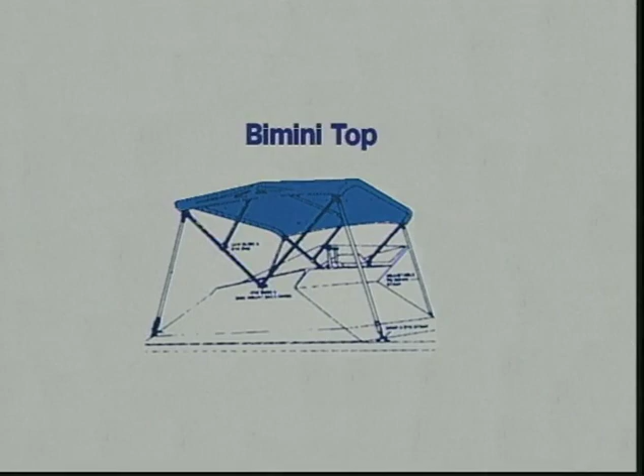We have a bimini top frame, which can be used on a flybridge, can be used in the center cockpit of a sailboat, it can be used on an aft cockpit sailboat, and it can be used on a center console fishing boat. On the other side of the brochure here, we have some Dodgers which require frameworks. And those are the things that we're going to be talking about today as to how to design the frame and how to bend it to fit the project that we're going to have.

Now, one of the most important things in designing framework and bending frames is what do we design to? You'll have to learn this, that boats are not built plumb, level and square. Boats are built crooked. They have rounded lines, and we have to make our framework make those lines look better. So the starting point for all frame design is this.

Find the center line of the boat and build everything that you build to the center line of the boat, disregarding the fact that the windshield might be out of square with the center line by an inch. Because if you try to build to the windshield, you may have your canvas running right off the corner of the boat. So we're going to show you right now how to find the center line of the boat.

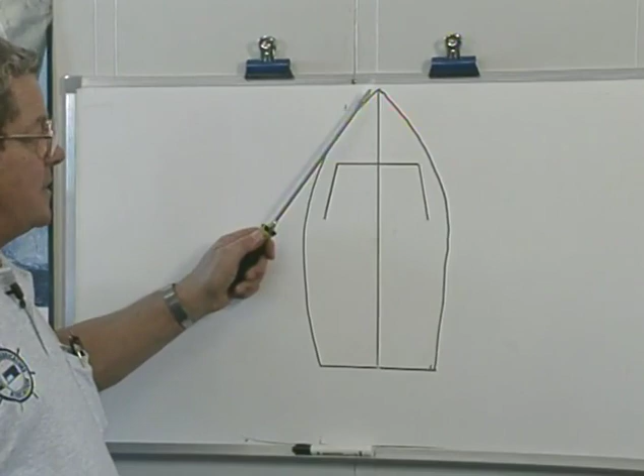And up here on the board, I have drawn a picture ahead of time of a boat. May not be the best picture in the world, but it's a top view of a boat. It has the outline of the windshield shown here, and I've drawn a center line. Now this one I drew exact on this picture. Now how do I get that exact center line on a boat? Well, here's the way that we go about it. We do what I call triangulation.

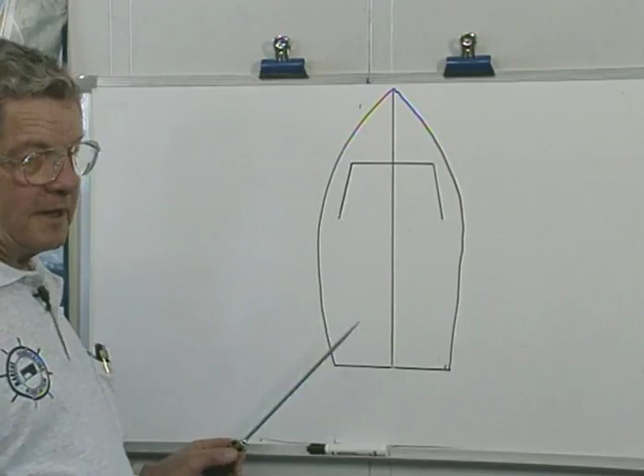It's pretty easy to find the center line on the bow because you can look and find the real center on that. It's fairly easy to find it on the stern because you can measure across. But what are we measuring across? Those points are the things that will help determine how we triangulate this boat. So what I do is I look on the boat for some place on the back corner of the boat that was designed into the mold that would be symmetrical on both sides of the boat.

Because when they build molds, they spend an awful lot of money building a nice mold. What we do not do is ever measure from something on the boat that was put on there by a mechanic or somebody like that, because they don't always put them in the same place on the boat. So we look for a place on the mold that is consistent. What do we do with those two places that we find?

We take our ruler, and I'm going to draw them on here. We're going to assume for the moment that I found a point on this corner and a point on this corner that were consistent on both sides of the boat. What I do is I hook my ruler on this corner and I measure across the center line of the boat to some point on the windshield. And where my ruler touches the windshield here, I will take a reading.

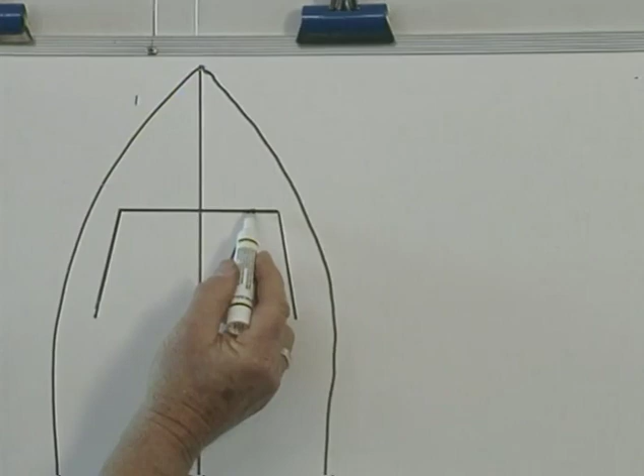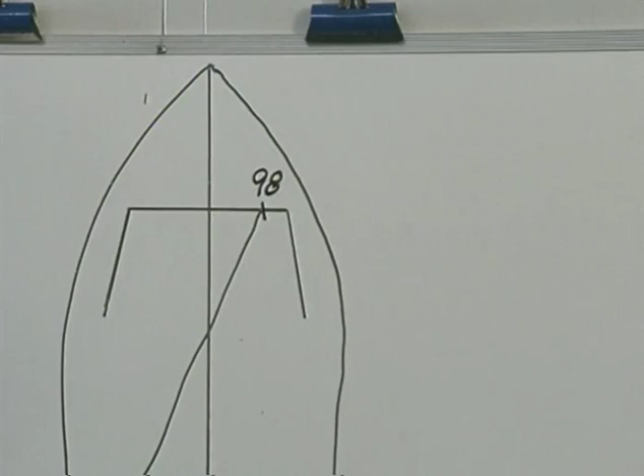And let's just assume for a minute that when I measured up here, my ruler hit the windshield at 98 inches. So I would put 98 inches right there and just put a mark on the windshield. Now to find the center line using the other corner of the boat, I'll hook my ruler over on the starboard side at the corner and bring it up across the center line of the boat, and where 98 inches intersects with the windshield, I'll draw a mark. And now I've got 98 inches over here.

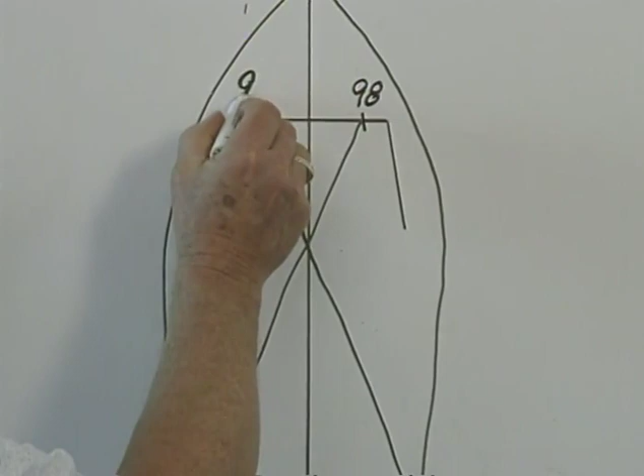How do I find the center line? If I measure from this mark to this mark and take half of it, I have now established the true center line of that boat. And that is what we will be building all of our frames to.

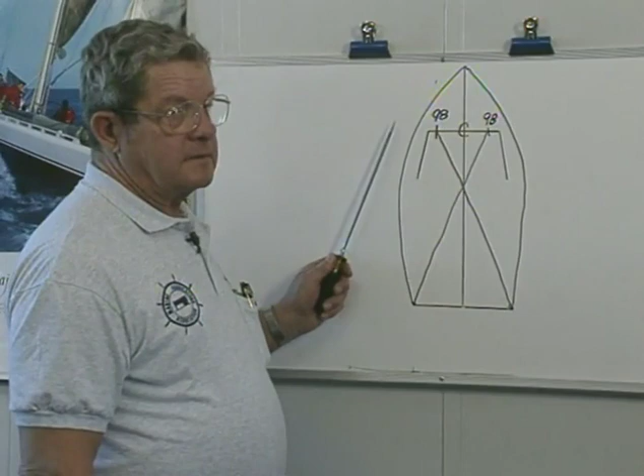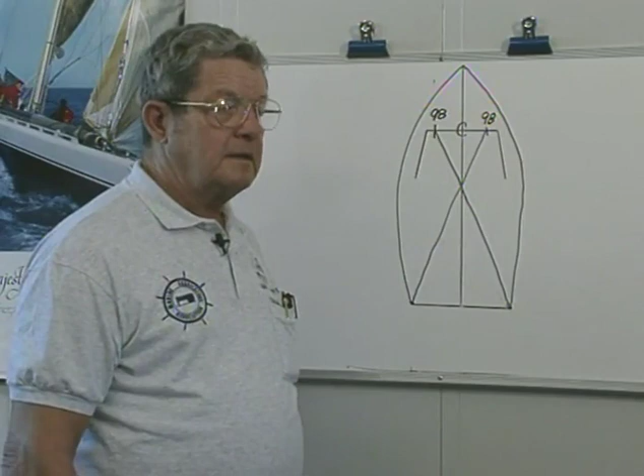Now, I don't have a picture of a sailboat up here, but all of the same rules apply when it comes to a sailboat. You'll find the center line of the bow. Masts are built into a sailboat in the center of the boat. I've never seen one that wasn't in the center, so we'll find the center of the mast. We'll find the center on the stern, and if I have to make sure that my product is right, I will string a line from the stern to the mast to the bow. I'll do the same thing on a powerboat, because everything that we build will be built square and true with the center line of the boat.

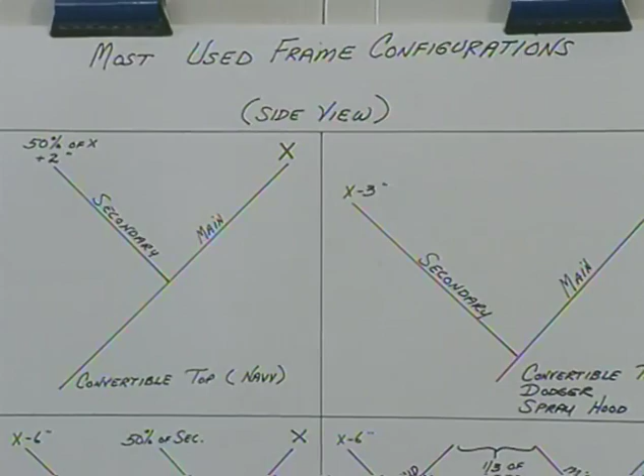Okay, now that we've established the center line on the boat, I've put a drawing up here on the board of the most used frame configurations that are used for all of the products that we have to build for boats. The reason I put these up here is so that you can have an idea of what kind of a frame you have to design. So I've got these 5 pictures here, and I'm going to start up here in the top left corner. This is the general configuration that would be used for a convertible top or a navy top.

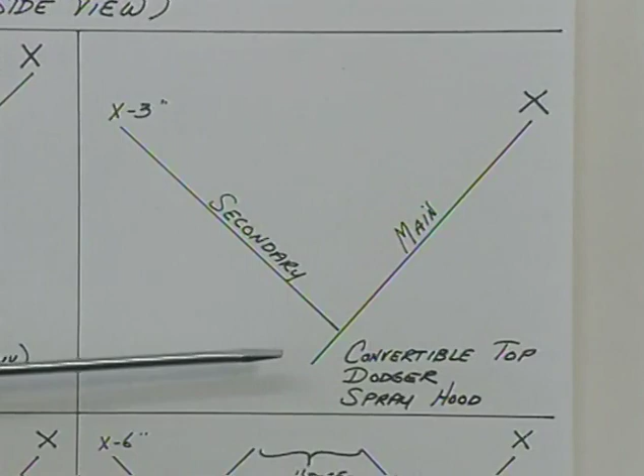The next picture on the right shows the general configuration of a framework that could be used for a convertible top, a Dodger, and a spray hood. Now, why do I have 2 different pictures for a convertible top? The reason is this. Years ago on the older boats, the first picture, you were able to mount your top on the coaming or someplace down in the boat or on the side panel.

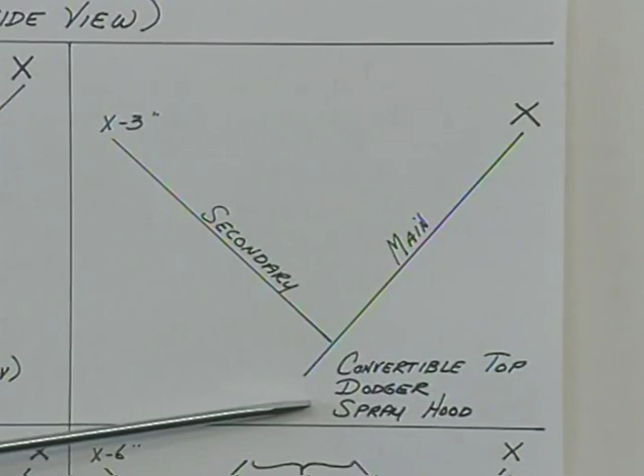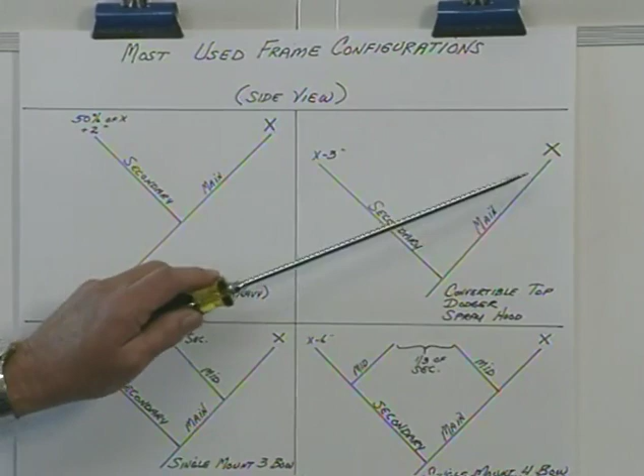Nowadays, the way they're building boats, we've had to change our configuration a little bit because the majority of the windshields are rounded windshields, and there is no place to mount the framework on the coaming. So we have to mount on the windshield. So consequently, when we get into the design and how to figure the leg lengths, it's going to require this general shape of a framework.

The next framework that we might be using would be for a bimini top, which is this picture here, and we call it a single mount 3-bow bimini top. The next configuration that we would be using would be a single mount 4-bow bimini top. Now I need to stop right here for a minute and say, why would we go from a 4-bow to a 3-bow bimini top or the reverse? The reason is we have some rules that we go by as to how many frames it takes to build a particular project on a boat.

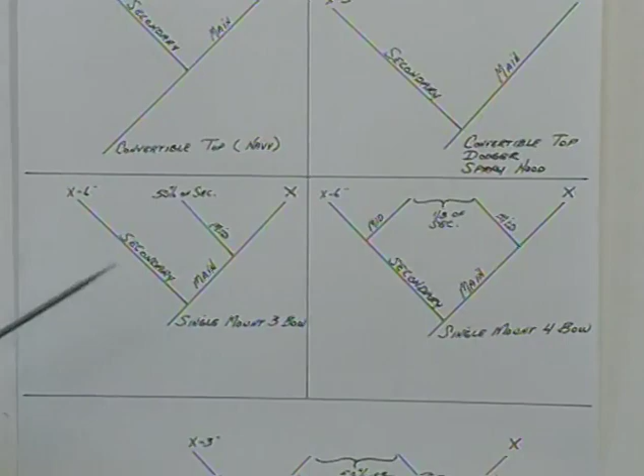And our rules are that we never go over 36 inches from frame to frame to frame. Same would be true on a 4-bow top. Same could be true on a Dodger or a convertible top. On a convertible top, you'd be going from windshield to frame to frame.

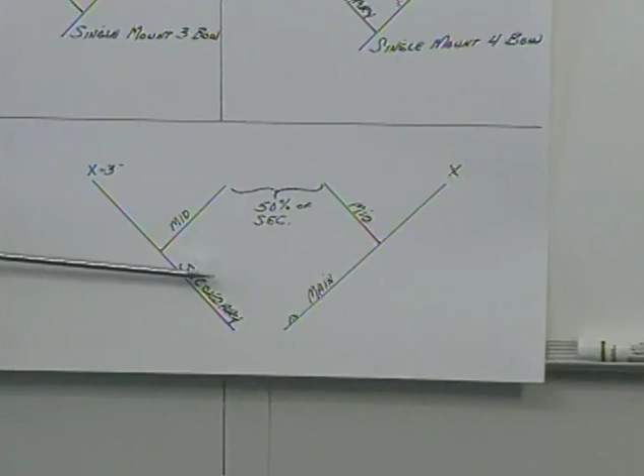The bottom picture down here shows you a 4-bow split mount bimini top. Why is it even needed? Because on center cockpit sailboats, many times the place that you want to mount your top is right in the middle of the area, and there's always going to be a winch or some crazy thing there so that you can't get the frame mounted where you want it. So we would split them out so that we could have a winch here and we could gain a little more length. This also can be done on some of your fly bridges where you have to have a very short frame as far as height, but a very long frame as far as overall length.

So these are the 5 most commonly used configurations of frameworks for boats. Now, I'm not going to take the time to go through what all of these things mean, but let me tell you this, that in order to design and bend frames with the system of bending that we have, we have to know what the main leg length is.

So on every one of these pictures here, you'll see that there's an X. And the leg lengths for all of the frames that attach to the main frame will be done by formulas. And I have taken this sheet and I've put up here the formula for the leg length for all of the succeeding frames that have to attach to the main leg.

So later in this tape, we're going to get to the point of teaching you how to determine what X is, and all of the rest of the leg lengths will be determined by formulas. And you'll have plenty of time to look over this complete chart and see what those formulas are.

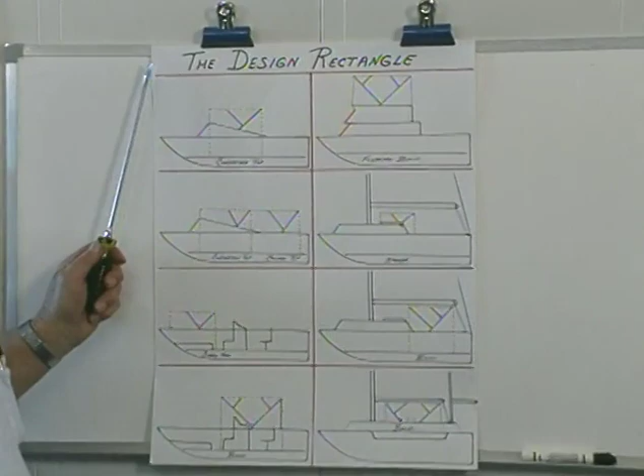Continuing on with design of framework for boats, I have here on the board what I call the design rectangles. It's kind of a crazy name, but it's the only thing I could think of. But when I walk up to a boat to design something for it, the customer's already called me and he told me he wants a particular product. So as I'm walking up to the boat, I have a mental image of a rectangle standing on edge.

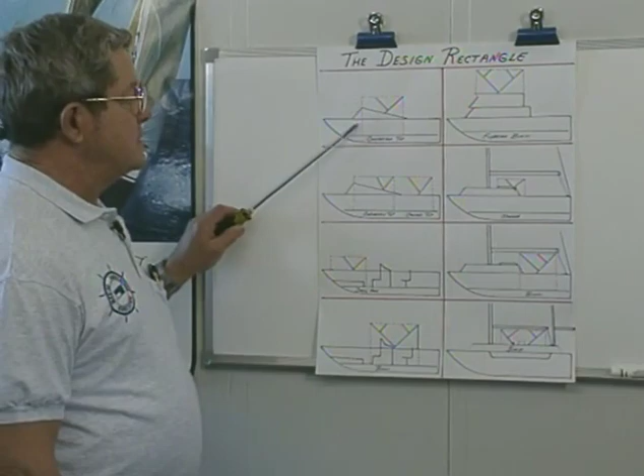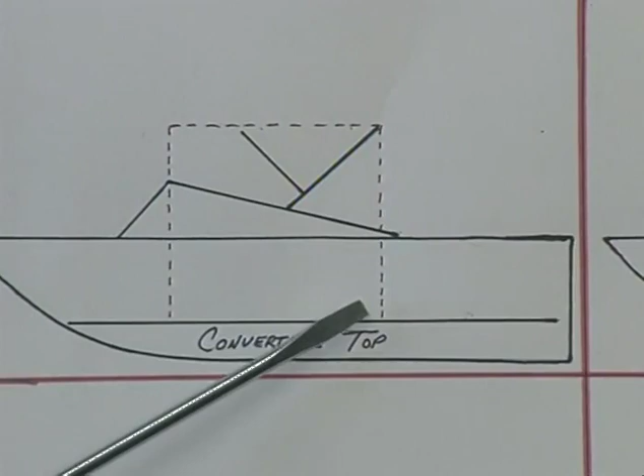So I've tried to draw these rectangles on all of these configurations of boats. And this rectangle right here is what I'm trying to explain to you. This dotted line represents that rectangle. What we're looking at right here is a convertible top. So what the rectangle does for me is this. It helps me establish an overall length of the area that's got to be covered, and it helps me establish a height of the area that has to be covered.

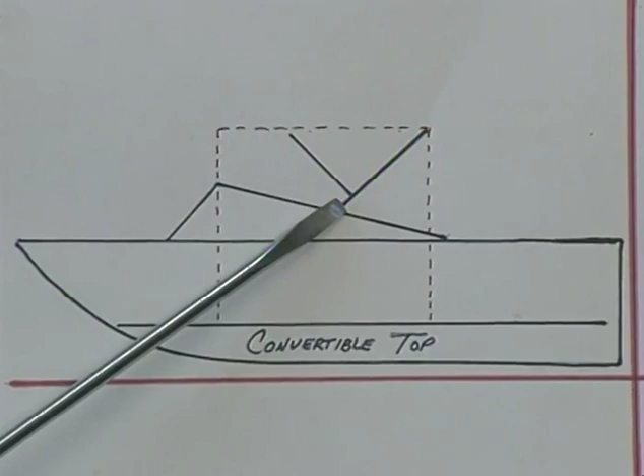So this is the rectangle that I'm trying to talk about. And this does one more thing for me. It helps me establish the configuration of the framework that might be required to support the canvas. It will also help me establish a mounting point. I'd kind of like to go through all of these different configurations with you so that you know what I'm talking about as I talk about these rectangles. This is what I would look at for a convertible top.

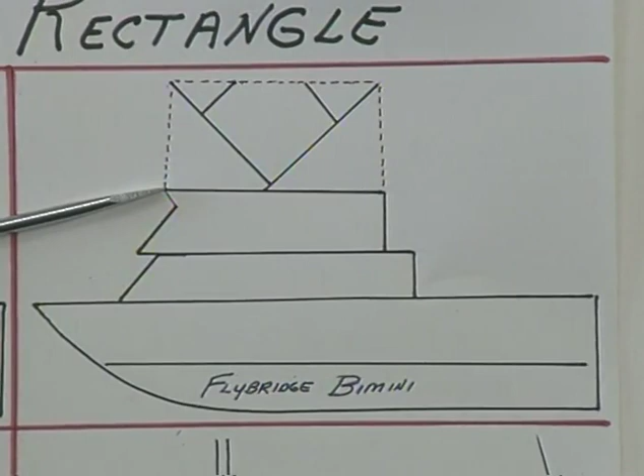The next picture that I have over here is for a flybridge bimini. You've got the cruiser with the flybridge on it. Here's your windscreen that's faired out to the front. The man wants his flybridge covered with a bimini top. So I look at the area that has to be covered. This gives me a height and a length.

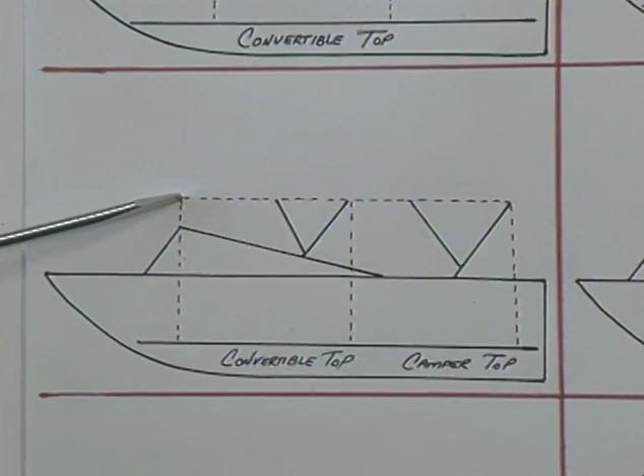Now we'll move on down to the next picture, which is a convertible top with a camper top. We have the same as the first picture, but behind that we've added another set of frames and another rectangle that establishes the length and the height of the camper top frame that we have to build.

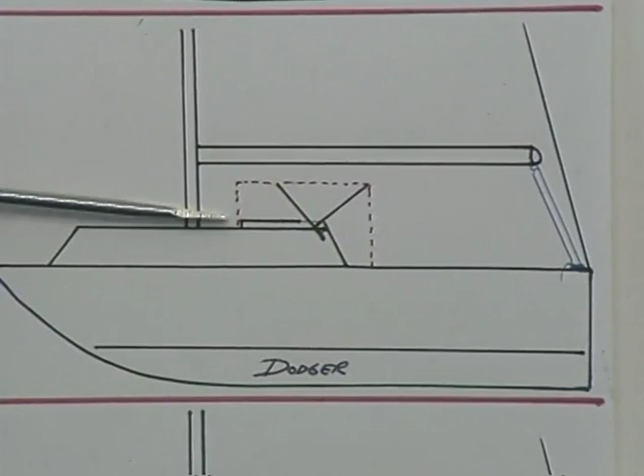We move on over to the next picture for a Dodger on a sailboat. Normally with a Dodger on a sailboat, the area that you would have to cover would be just forward of the companionway. And we always try to finish the Dodger approximately 6 inches aft of the companionway opening. Why? So that when the Dodger's up and it's raining or the boat's taking on water, it doesn't shoot water down below. So here's the rectangle, height and length.

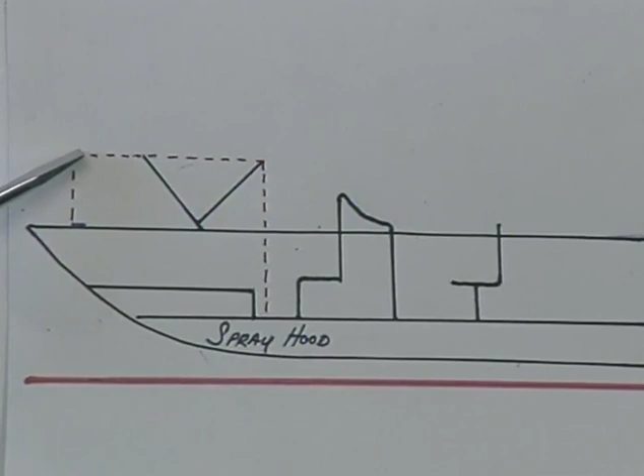Moving on down to a center console fishing boat, you have a spray hood, which is nothing more than a Dodger on a sailboat, except that they call it a spray hood because it's on a power boat. It does all of the same things. It protects you from the spray and the elements. So again, the same rectangle from the coaming up for height. Length is determined by coming back and trying to cover the step that's built into the boat and still allow room for the customer to walk around this console, which is this thing right here. So now we've established a height and a length.

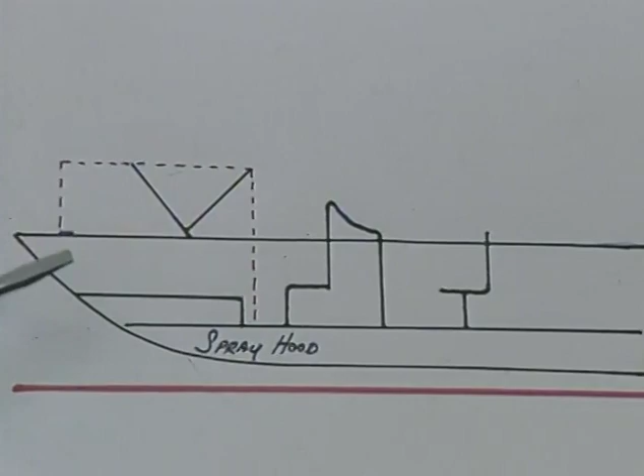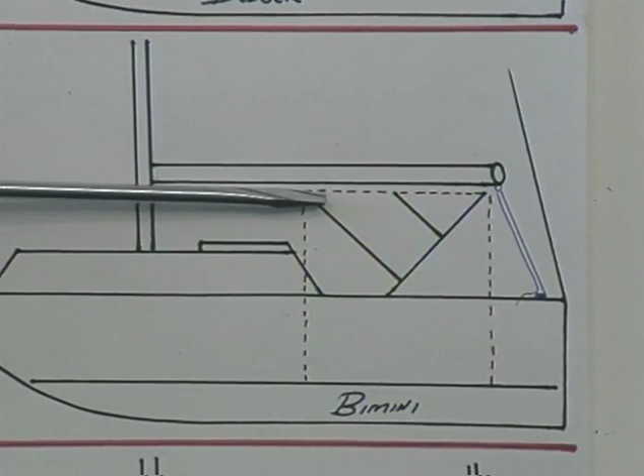Moving on over to an aft cockpit sailboat, and we want to build a bimini top on it. We measure the area of the cockpit that we have to cover. We get the height off of the deck, and that will be determined by the boom, because when we build a bimini top on a sailboat, we always build our tops so that they're at least 1 inch lower than the boom when the boom is sheeted down tight. So now that establishes height and length.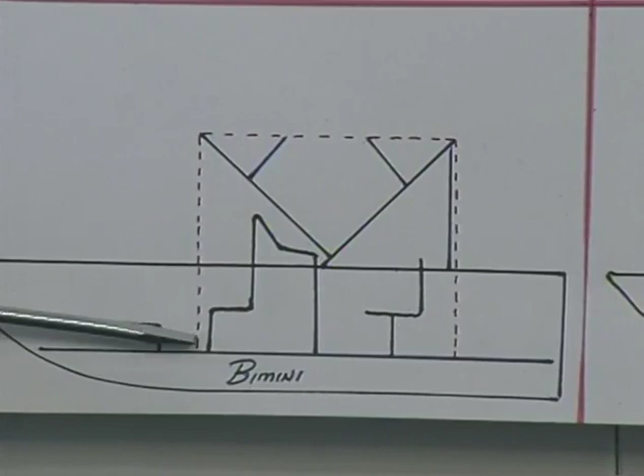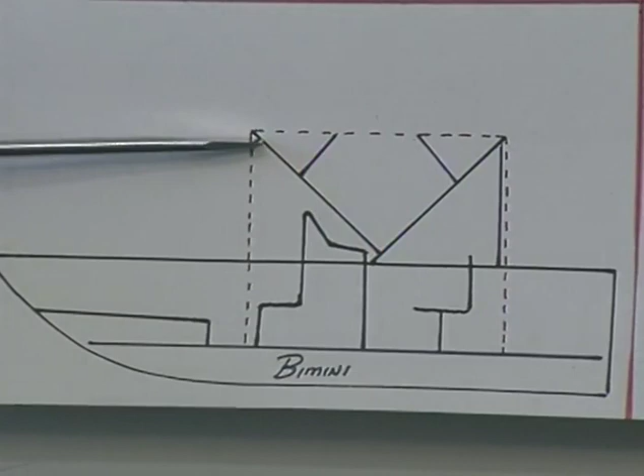Normally we would want to cover from the forwardmost seat to the aftmost seat. So now we've established the length of the rectangle and we've established the height. What did we establish for height? We established 6'4". Why? That's an arbitrary figure that we came up with, but the average man is about 6 foot tall, so we make our bimini tops 6'4" tall unless he specifies otherwise.

And if he has tall friends, we take a chainsaw and cut their legs off.

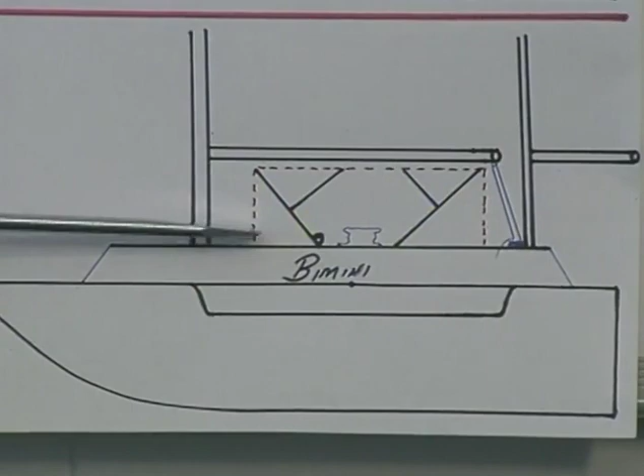Continue on down to a 4-bow bimini top on a center cockpit sailboat. I've got what used to be a Morgan 41, I think it was. Anyhow, it's a center cockpit here. That will establish the length of the rectangle, and the height again will be established by measuring from the mounting point up to 1 inch below the boom.

On sailboats, you have to remember this, that you may not always be able to give the customer 6 foot 4 inches. It's your job as a fabricator when you sell a bimini top on a sailboat to make sure that you either get permission from the customer to put the mainsail up and sheet it down tight in the middle of the boat, or have him do it and set the topping lift so that the boom will never be any lower than that. Then you build to within 1 inch of that point.

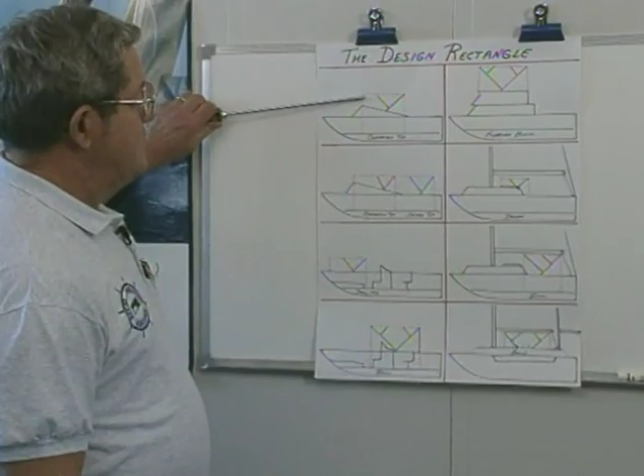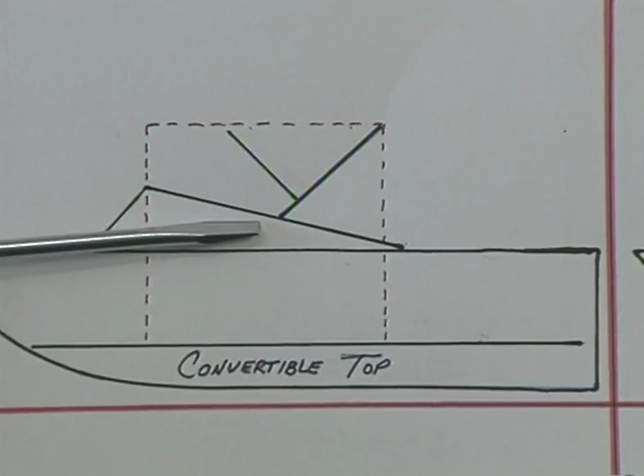Now, back to my rectangles, okay? When we're designing frames, it's your job as a fabricator to figure out where you're going to store these tops. And they get worse and worse to figure out as we go along. This is the new style of convertible top on the newer style runabout type boats. And again, I said they had to mount on the windshield, and many times they have to store over here behind the back seat. But again, it's your job to figure out where they're going to store and tell the customer where that's going to be.

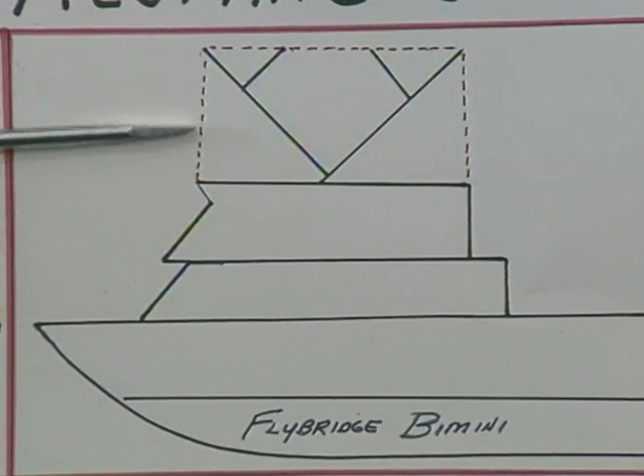On the next picture over here for a bimini top on a flybridge, many times you can't lay it down to store it, because if you laid it forward, it would be laying out over the windscreen. If you laid it aft, it would be laying out over the back end of the bridge. So what do I do? I would draw another line here, and that would represent a stanchion for storage purposes. Then when you fold the top up, all of these frames fold up to this frame, and you put a boot on it so that it looks nice. That would be the storage position for that.

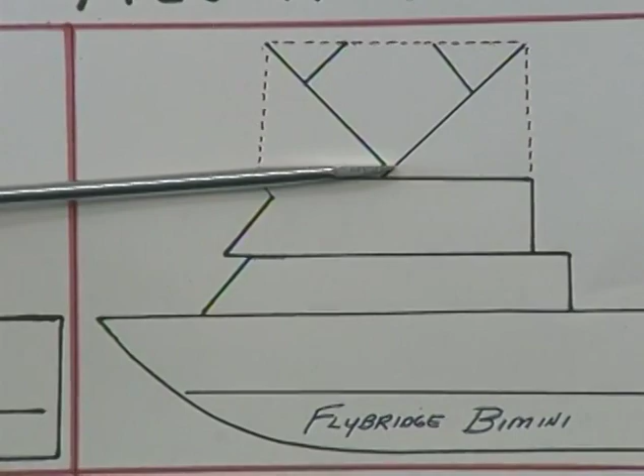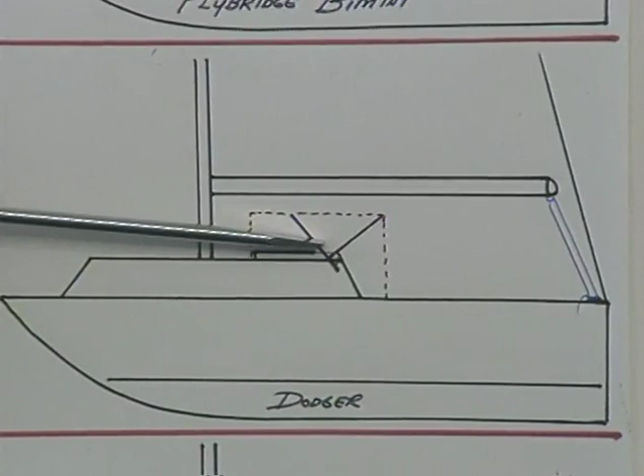Back down to a convertible top and a camper top. Most of the time, a camper top, you can make it lay on the stern of the boat. In the newer boats, again, this frame probably will have to come off and go down behind and under the back seat. Continuing back over to a Dodger, you got a 2-frame Dodger here. You can't store it aft because it's going to be right down in the cockpit, so it's your job to figure out how to get it to store by laying it down here.

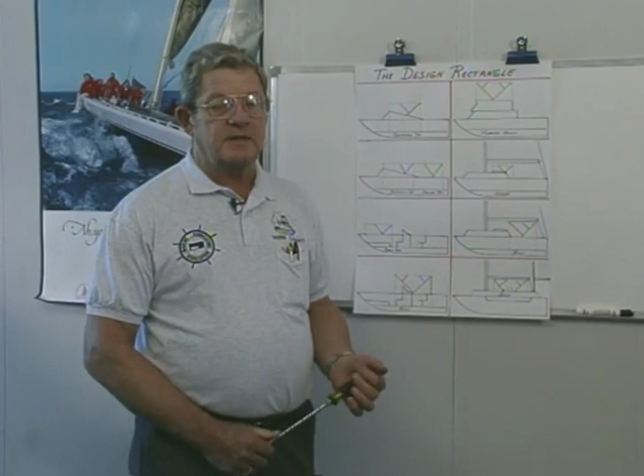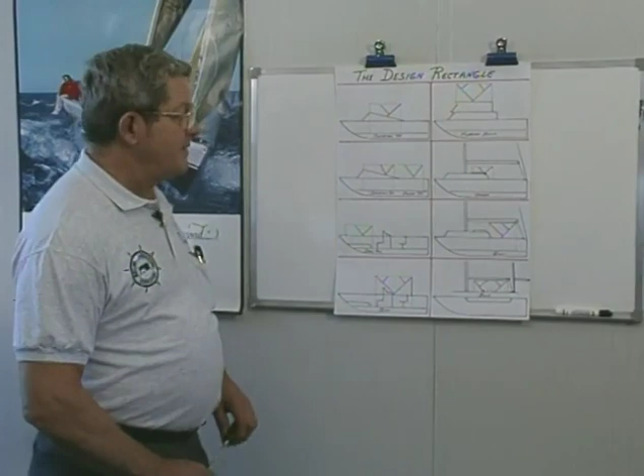Now, I'm going to stop there just a minute and explain one thing about storage. Every one of these configurations for every one of these frame designs, the storage will be determined by where the main frame is, because the main frame will always be on the bottom of the pile. Why is it on the bottom of the pile? So that when it's in the storage position, which is laying down, the fittings that attach the other frames to the main frame won't be digging in the boat. So if you look at all the frames that I have on these drawings, you'll see that the main frame normally is in a position where it can just lay down and store.

Back to my rectangles for a minute. Here's a center console fishing boat. 2 frames. This is the main frame. It's going to lay down up here, and this frame will be on top of it.

On over to the bimini top on an aft cockpit sailboat. Sometimes they'll lay down aft in front of the main sheet. Sometimes you've got to lay them down forward. If they had to lay forward and up over the companionway, then you would reverse this set of frames and put the main frame forward and the secondary frame aft.

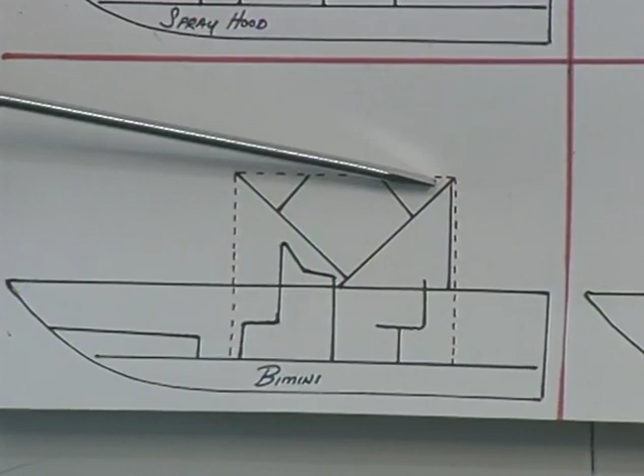Down to the bimini top on a center console fishing boat. Again, you see this one, I've already sketched in the stanchion. Why did I put a stanchion here as opposed to laying it down? Because it's a fishing boat. If I were to store it forward, it'd look kind of weird. So we're going to store it aft, and we're going to put a stanchion here, let all of these frames fold up, put it in a boot, and it's still a fishing boat because you can fish behind it, in front of it, under it, and up forward of it.

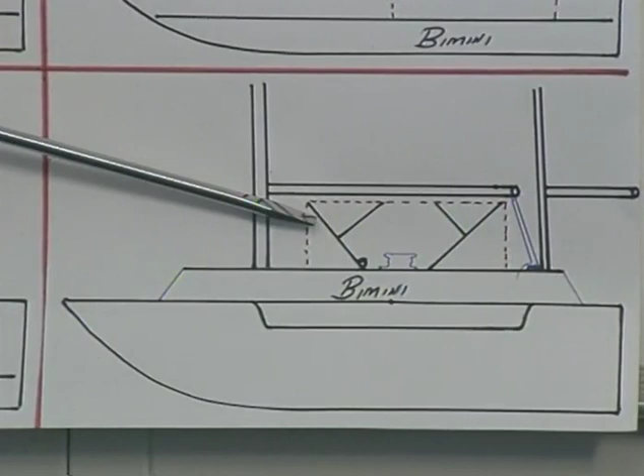When it comes to a 4-bow split mount on a center cockpit sailboat, again, the storage position will be determined by where the main frame can lay down. And you'll notice in this particular drawing that I have it storing forward because this frame can lay down up forward and be out of everybody's way.

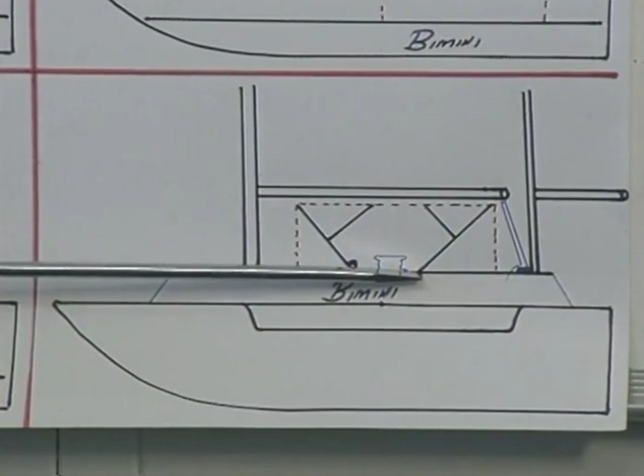You'll also notice that down here on the bottom of the frame I have another fitting on here which represents a jaw slide that's put on there so that when we lay this pair of frames down, we can come back and pull a fast pin out of this set of frames, carry them forward, fold it up, and lay them on this set of frames and put the fast pin back in. And that takes care of the storage problem.

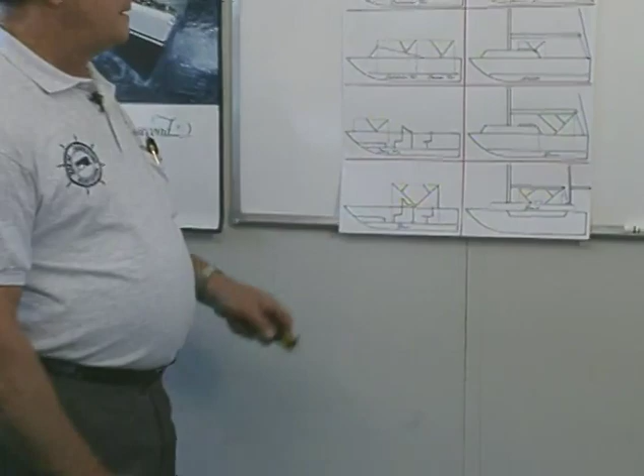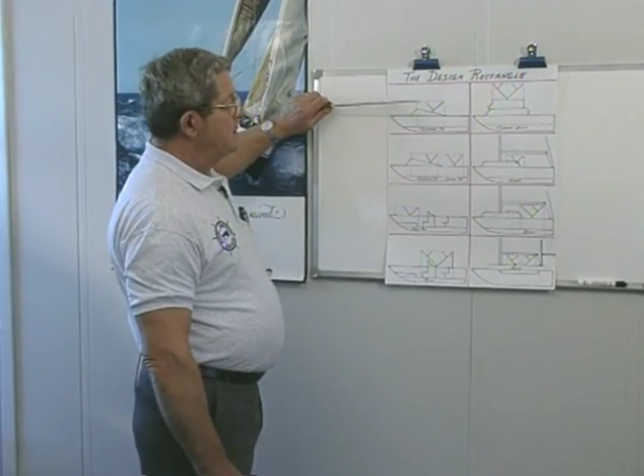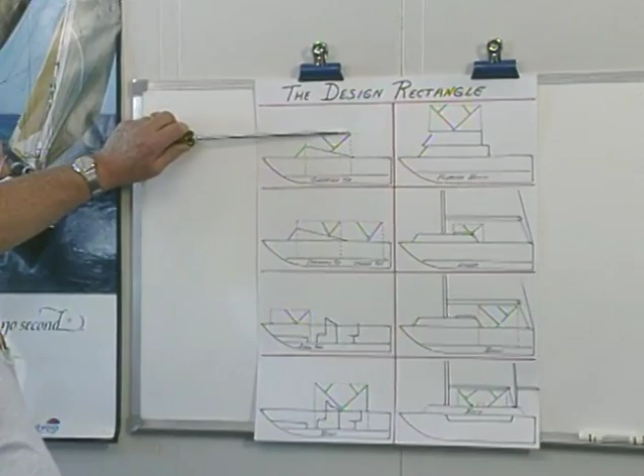I have to go back one more time on my rectangles, okay? When we go back up here to the convertible top, I hope this doesn't get too boring, but these are the design problems that you run into. When we draw this rectangle, it does a whole bunch of things for us. It establishes length, height, and mounting point. And the mounting point normally for most frames will be approximately half of the overall length of the rectangle.

Or in the case of these little short frames on windshields, it will be half of the dimension from the secondary frame to the main frame, because you have to visualize where the canvas is going to go, which is from the windshield to the secondary frame to the main frame. Over here on a flybridge bimini, normally it'll be half of the overall length.

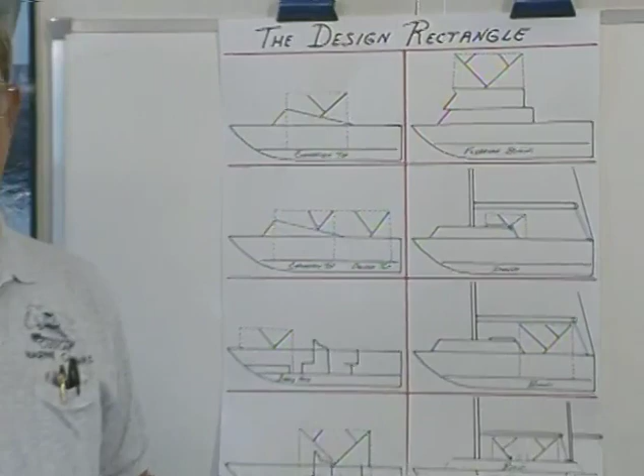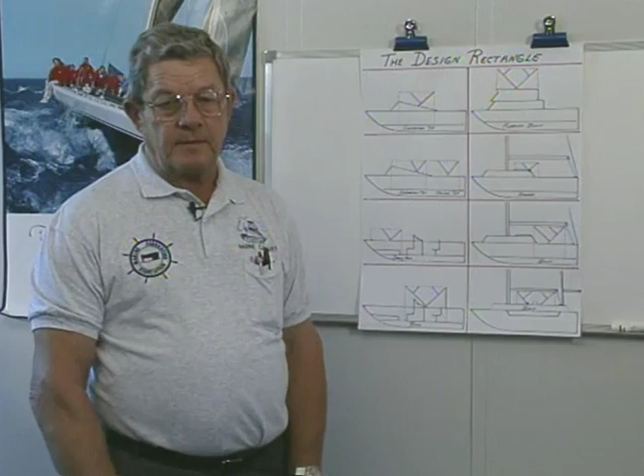And this holds true on all of these, but if you'll learn to use these rectangles in your designing, it will help you determine where the frame is going to mount, and that will in turn help you design the leg length for the main frame. And we're going to get into that a little bit later after we talk about the bender, but you do have to find the leg length in order to use the other formulas that I gave you before.

I have here in my hands a bender, which we call the Bend-Right bender. Now there are a lot of benders on the market. Back when I wanted to learn how to bend frames, there were no benders on the market, so I had to design one. So this is what we call the Bend-Right bender, and for purposes of these demonstrations on these tapes, this is the one we're going to be using. It has some formulas that go with it. All benders must have a formula to go with them in order to work. For those of you that have other kinds of benders, if you need, I'll be glad to help you try to figure out a formula that will work. But for this demonstration, we're going to use the Bend-Right bender.

Now the formula is this. We have to know two things to bend a piece of tubing into a frame for a boat top. We have to know a leg length, and we have to know a width. And from that point on, we can bend any frame that we want to bend. And this bender, by the way, will bend anything from 3/8 awning iron up through and including 1-inch stainless steel. And it also is done by hand, but it can be done by a 98-pound person that's soaking wet. So you don't have to be afraid of having enough strength to do it. So now I'm going to lay this down and I'm going to show you the dimensions that are required to be able to bend a frame from a straight piece of pipe.

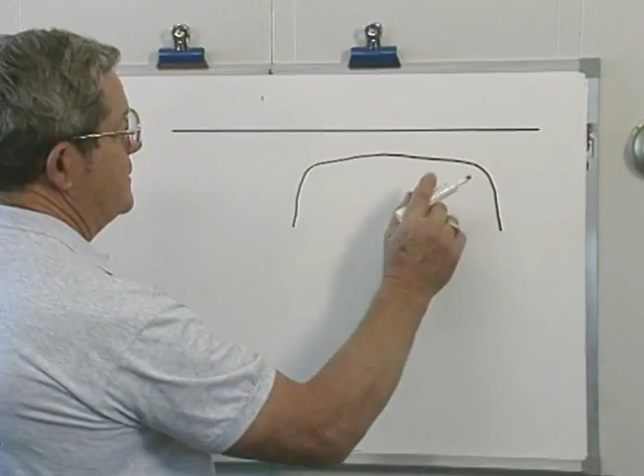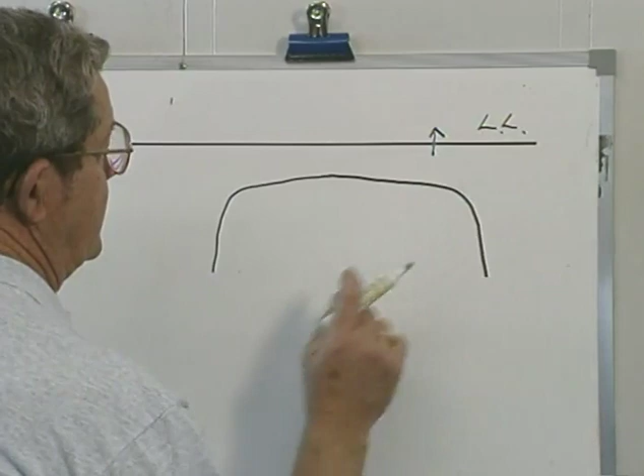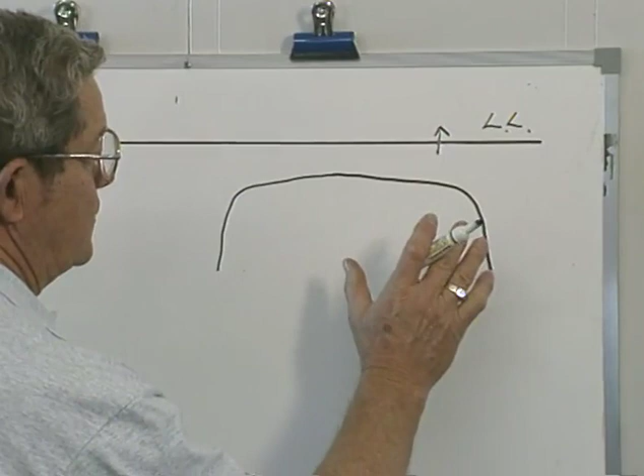We need to know a leg length, which we call LL. Then we need to know a layout width, and we need to know a mounting width. This is our mounting width, this is our layout width, and this is our leg length. So I'm going to take a straight piece of pipe and lay it out with the formula. We lay out a leg length, we lay out the width minus 20 inches to get to the start of the next leg length.

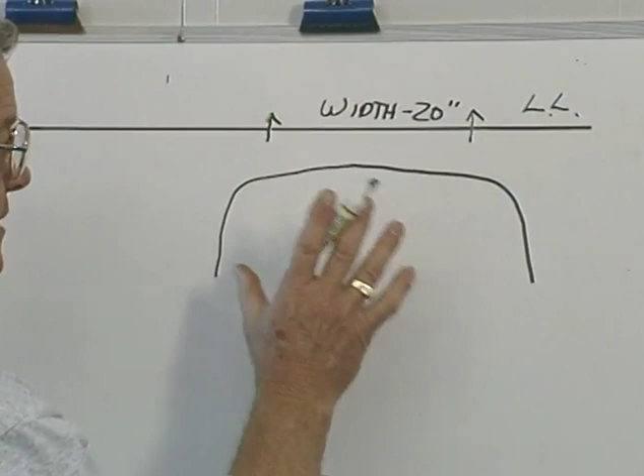Now we use a particular system of marking on this bender for this reason. Everybody in the shop knows the same system, so that if I start a frame and somebody has to finish it, they know how to keep going. So to designate leg length, we use an arrow halfway around the piece of tubing. To designate width, we go width minus 20 inches and put an arrow for the start of the second leg while we have our ruler laying right there.

We take half of this dimension here and put a line with a C through it, which represents center line. Remember the center line of the boat? Now we get a center line on a frame. Then we take the dimension from the center line to the leg length, and we put as many 8-inch increments as we can get on each side of center, and they are designated by hash marks.

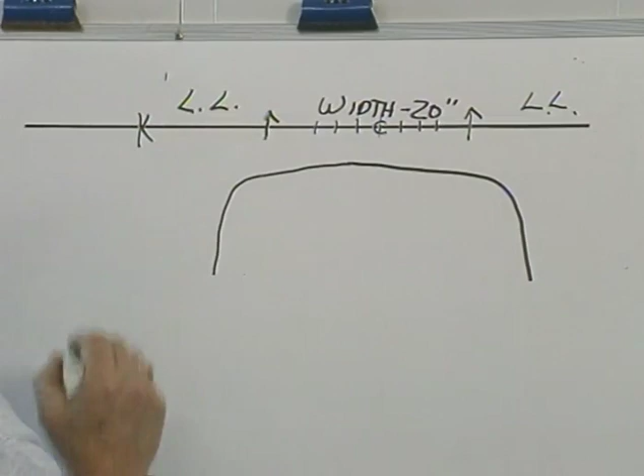The last item is to come down here and establish another leg length. Whatever the dimension was over here, we make it over here. We got another leg length. And in Florida, we spell cut with a K. And now you have your tubing laid out with all of the marking ready to bend it.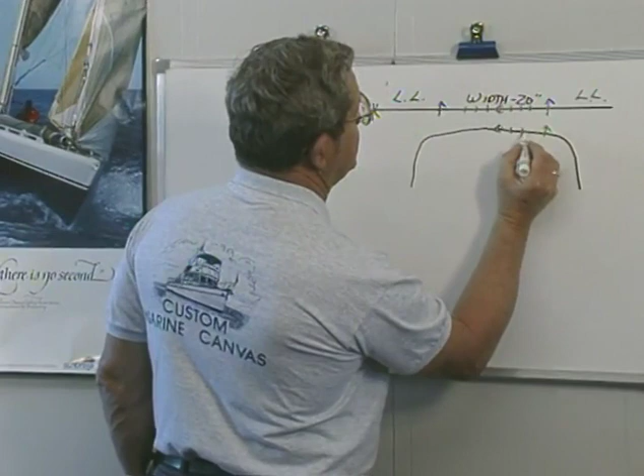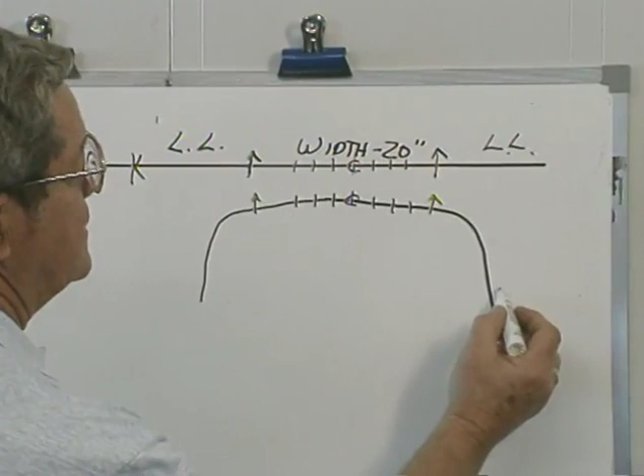Now I'm going to show you how this relates to the frame after it's bent. After this is put into the bender and bent, these marks will all end up right here on this bent frame. Now the relationship of all of these is this. This is the leg length from the mounting point here up around the corner to this arrow. The layout width is the dimension from this point here to this point here. This is the layout width, and we just put LW for layout width.

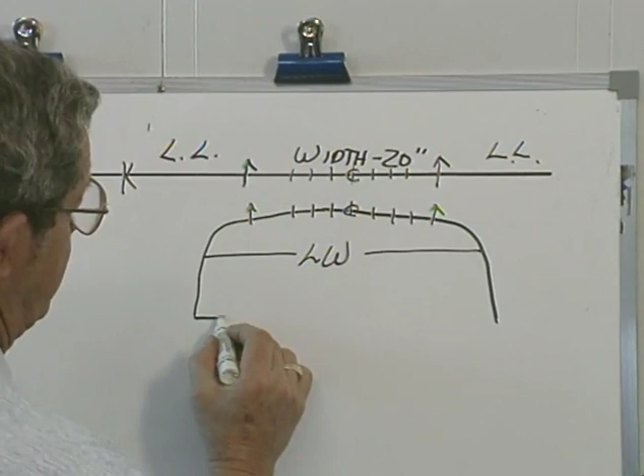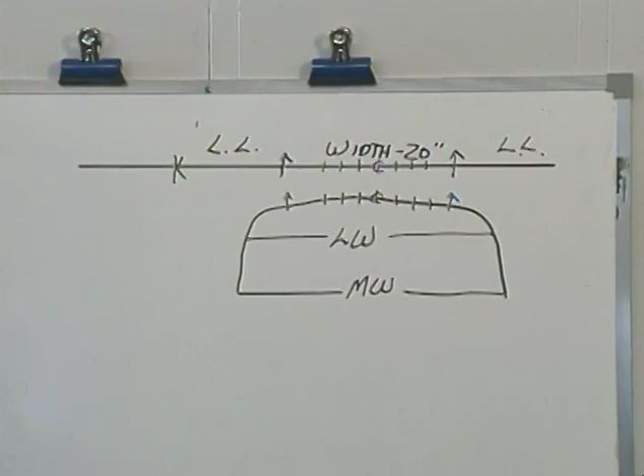The mounting width is this point from where it mounts on the boat on one side to where it mounts on the other. Three things that you have to know in order to take a straight piece of tubing, lay it out, and bend a frame.

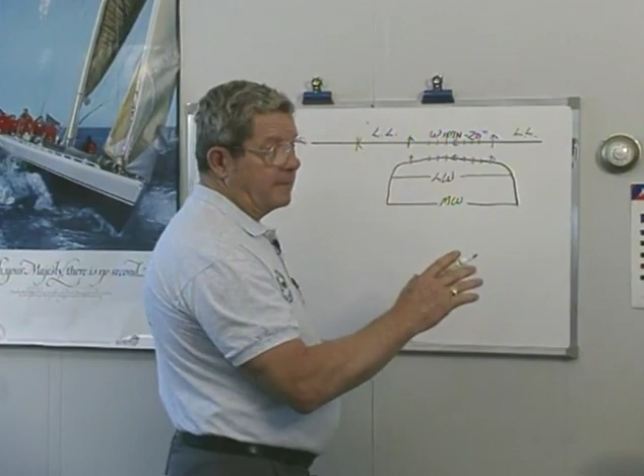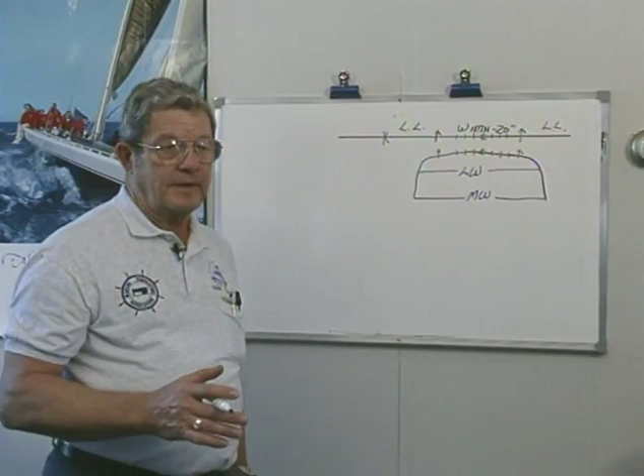Now the first thing that we have to figure out is how do we find the leg length? And there are 3 ways to find the leg length, and I'm going to give you all 3 of them. One is using the leg of a triangle, which is a geometric way, and I'll do that on the board. The other one is we use the corner of the table, and it really sounds weird, I know, but we don't make scale drawings. We just take measurements and go make our frame. The other way is with the bent tent pole method, which you haven't even seen yet, but you will see that a little later in the tape. So again, 3 ways of doing this: leg of triangle, corner of the table, and a bent tent pole method.

Now I'd like to show you how to figure out the leg length for the main frame of your frames using the geometrical way of figuring the leg of a triangle. I'm going to revert back just a minute. Remember our rectangle that we used for designing this frame on the boat. We filled up that rectangle with a set of frames. In this case, we used a 3-bow Bimini top frame.

We have to know what the leg length of the main frame is to determine what the other 2 leg lengths are going to be. Now we have 2 known facts in this equation. We know the height of the rectangle, which is A, and we know half of the length of the rectangle, which is B.

Now to find out what C is going to be, here's the route that we go. We take the dimension for A and square it. We take the dimension for B and square it. And A squared plus B squared will equal C squared. Continuing on, we'll take the square root of C squared and add 4 inches to it, and that will give us the leg length of our main frame.

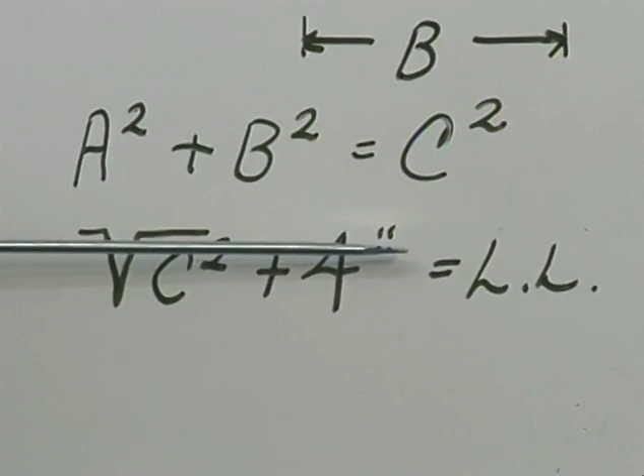The reason that we have to add 4 inches to it is this: it takes 4 inches more length to get up the leg and around the corner over to the leg length mark on the piece of tubing that I had up on the previous picture.

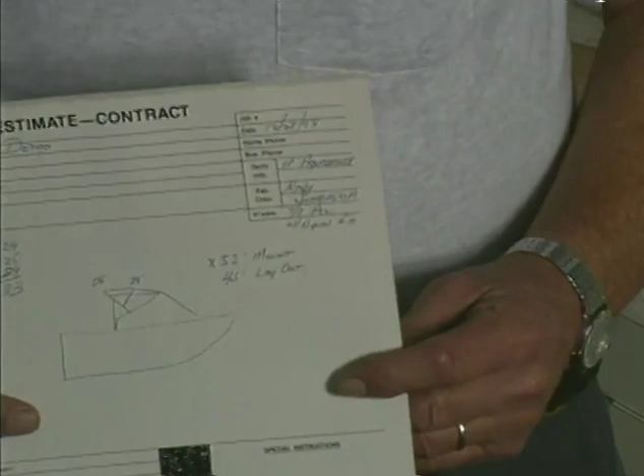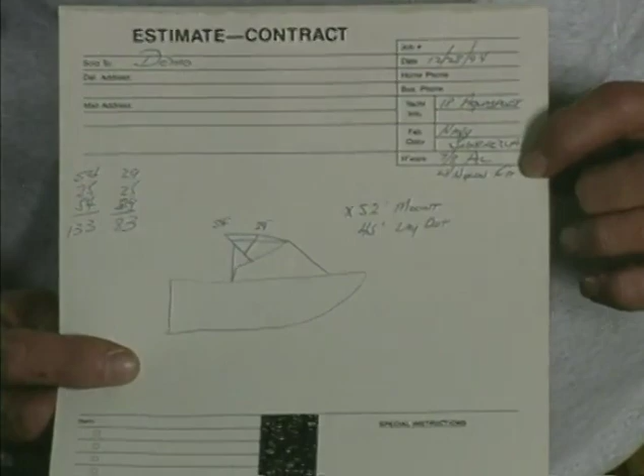Okay, now that we have that problem solved, I'd like to spend just a little bit of time on a typical work order for a convertible top frame for a boat that we've already measured. You'll notice that on here we've got the date and the kind of the boat, the kind of material that's going to be used, the fact that we're going to use 7/8 aluminum with nylon fittings, customer's name,

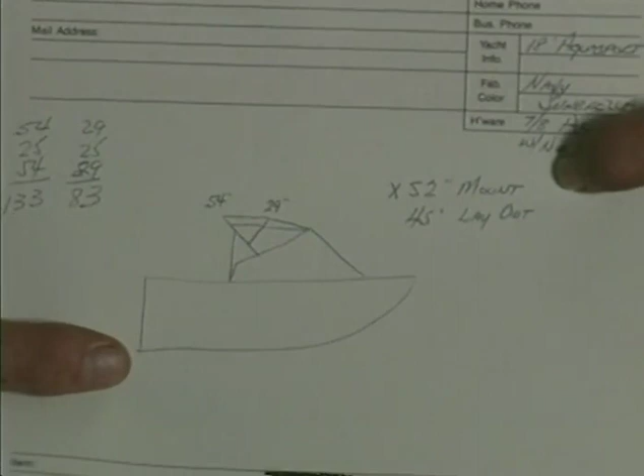and what we have done ahead of time in measuring the boat is we used the bent tent pole to measure for this particular top, and we found out that the leg length for the main frame was going to be 54 inches. The leg length for the secondary frame is going to be 29 inches, and we're going to have a 52-inch mounting point with a 45-inch layout.

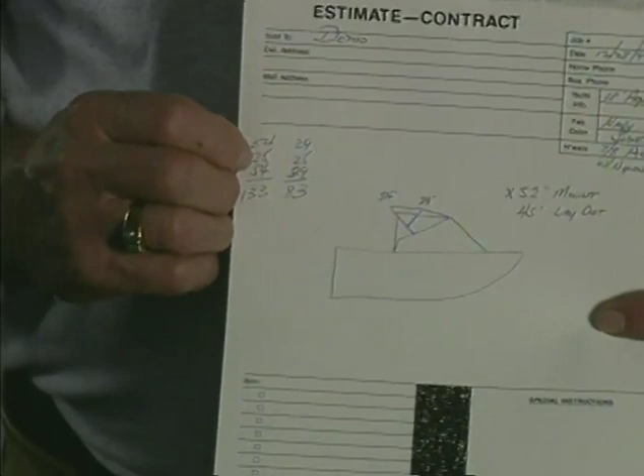So what we did, in order to make an intelligent estimate, we added up those figures to see how much tubing we had to charge for. And if you add up these figures, which are used in conjunction with the formula with the bender, we found out that we needed one length of tubing was 133 inches, and the other one was 83 inches. Consequently, if you add those two up, they come to less than 240. What that tells us is that we're going to get this out of a 20-foot length of tubing, so we charge the customer for a 20-foot length of tubing for this top.

So now I'm going to show you how we go about laying out the tubing, marking it, cutting it, and bending it. And we don't try to remember things. We put it up on the wall so that we can look at it, because there's too many places to make a mistake. We try to use the table and the ruler to our advantage all the time. I have a 20-foot length of tubing here.

I need a 54-inch leg for the main frame, and we use a Sharpie for marking the tubing because it gives us a sharp mark that'll stay on the tubing. And we have a complete system of marking that you have to use with this bender only because of this. If one person in the shop knows it, everybody else in the shop knows it. So if somebody starts a set of frames and walks away, somebody else can pick up where they quit and keep going. So here's what we do.

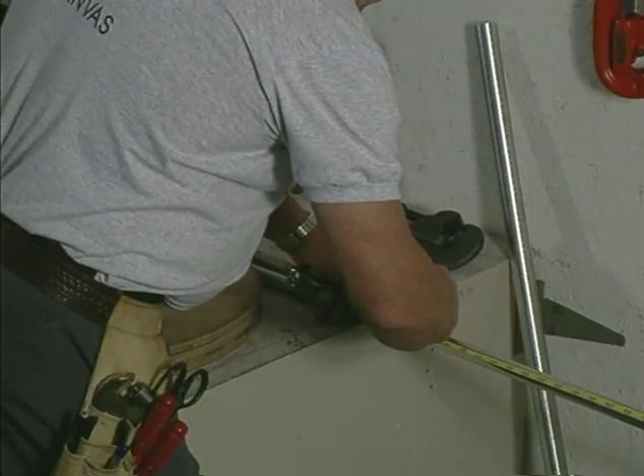The first leg is going to be 54 inches. I'm going to measure from the end of the tubing up 54 inches. And I'm going to put an arrow on the tubing, and I'm going to put it roughly halfway around the tubing. And that's what it looks like. Now, to continue using the table to my advantage, because I don't have a helper here, I slide the arrow up to this 2x4, which is our backup board.

And the formula for this bender says to do this. Mark the leg length, take the layout width minus 20 inches to get to the start of the second leg length. So I'm going to take the 45-inch layout width, which is what I want, deduct 20 from it. I'm going to measure over here 25 inches. I need to stop there just a minute and tell you this. That formula is cast in concrete. It's on every frame that we ever use.

Why do we deduct 20 inches? Back when I designed the bender, it was a figure that was always constant. It was a figure that anybody could deduct from any other figure in their head without a piece of paper. The reason it's 20 is that you'll find that there's 10 inches of width built into the leg here. Consequently, there'll be 10 inches over on the other side. So this is why we always deduct 20.

So I'm going to take 45-inch layout, deduct 20, come down here to 25, and I'm going to put another arrow that matches that one. And there's what it looks like. Now, I would not be picking it up, I'd be leaving it lay right there. And while I've got my ruler strung out here at the 25 inches, I come down here and put the center line of the frame, which is at 12.5 inches. And that mark is a slash with a C through it.